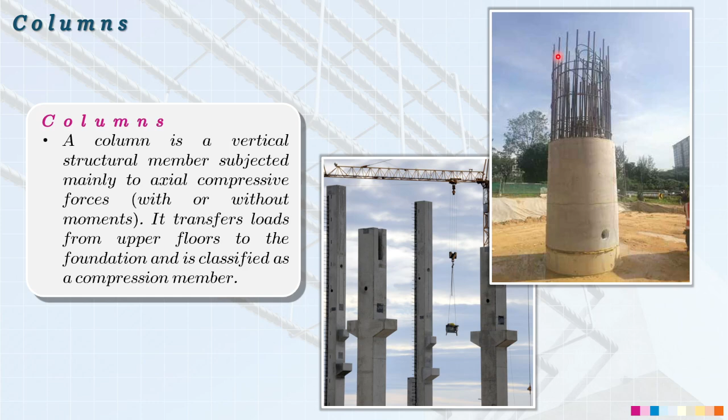This means that our column experiences what we call compression stress. If we use a particular material for our column, the best material for this is obviously concrete. And also, to resist the bending or twisting or other reactions experienced by our column, we also place main reinforcements.

Alright, so we will have types of columns. One aspect here is based on form and reinforcement. This means that the type of our column is mainly based on how it is constructed. One of the most common types we see is what we call the plain concrete pedestal.

When we say plain concrete pedestal, or simply a pedestal, this is a type of RC column or reinforced concrete column where the height is small. Mainly, the pedestal is used when we have steel members, or when we have steel columns. It's mainly used when we have supporting equipment, and its main frame consists of steel.

A good example here is when you construct a steel pole. In actual scenarios, there are steel poles that cannot be directly buried in the ground, because we know that steel is prone to corrosion. So in order to do that, we first attach it to what we call a pedestal, which consists of a base plate, and also anchor bolts, which become the connection between our concrete member, the pedestal, and our steel members.

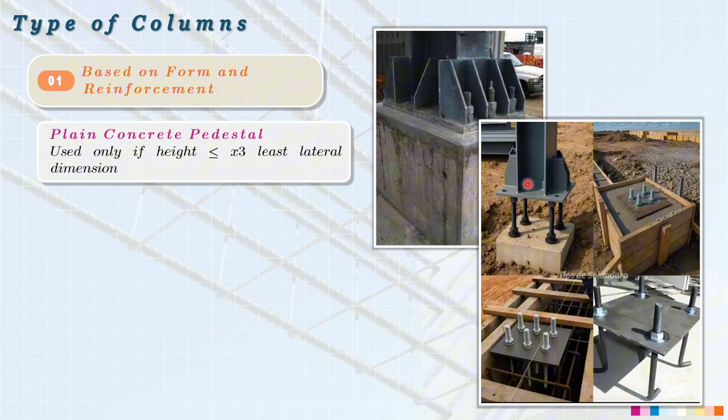So the next type of our column is what you call tied columns. This is the most common in construction, because when we say tied columns, it means that the longitudinal bar, to hold up its position, uses what we call lateral ties. This was already discussed in the topic of beams.

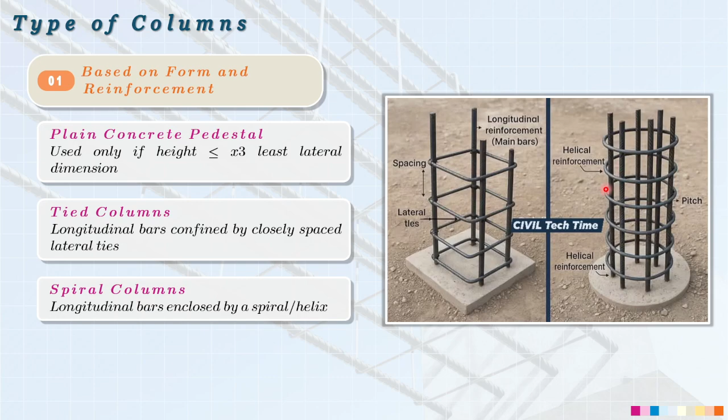The last type of column is what you call composite columns. Composite columns means reinforced concrete combined with steel members, or structural steel, meaning it's not just reinforced concrete material. We introduce steel sections which can be I-beam, wide flange, or pipes. Typically in this class, composite columns are not paired with main reinforcement because the main reinforcement is the steel member itself, though in other designs rebar is still added. Overall, once you introduce a structural steel like wide flange or pipes, the column is no longer a reinforced concrete column, it is now called a composite column.

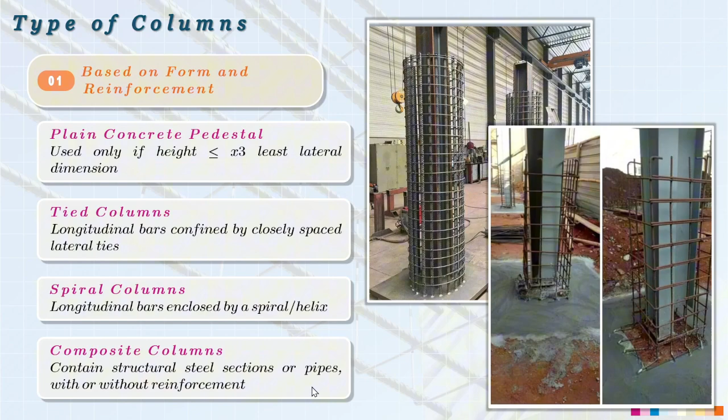We also have types of columns based on loading position. The first is what we call axially loaded columns. This means that if we apply a point load on the cross-section of our column, it is located at the very centroid of the column. This is where the loading is always applied. This means the column experiences compression stress.

Another type based on load position is what you call eccentrically loaded column. This means we will consider what you call eccentricity. If we consider eccentricity on our point load, it means we will have what is called a bending moment.

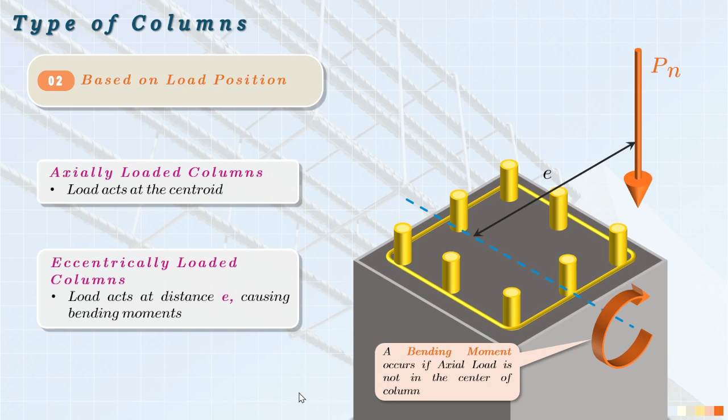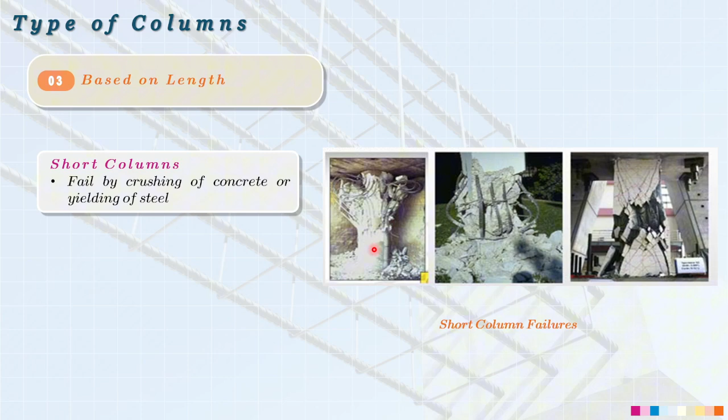Let's continue with the types of column based on length. We have two types of column based on length. The first is the short column. When we say short column, if we only consider the length, we won't actually know if it's a short or long column. To properly define it, we need to consider how the column fails. If the failure of the column is based on crushing, meaning the column is compressed, then you are seeing a short column. This means there is failure of the concrete and failure of the steel at the same time, but the behavior of failure for a short column is simply by crushing or compression, as you can see in our sample images.

The next one is the long column. When we talk about long column in terms of failure, instead of a crushing failure, there is what we call buckling. Buckling means there is bending happening, meaning the column is not simply compressed into a final shape but instead experiences bending. This kind of bending is what we call buckling. So if you are seeing this kind of failure, you are seeing a long column.

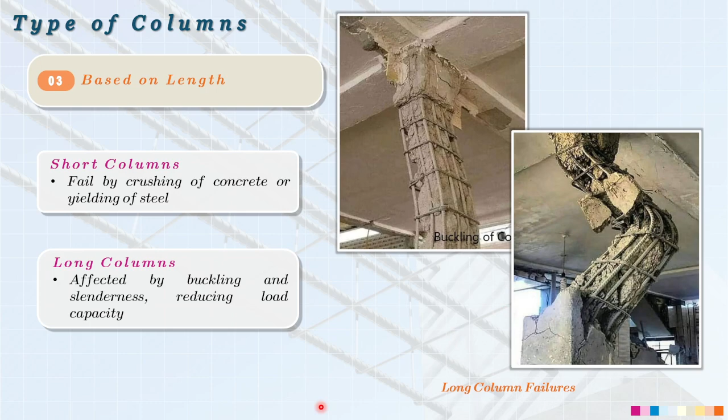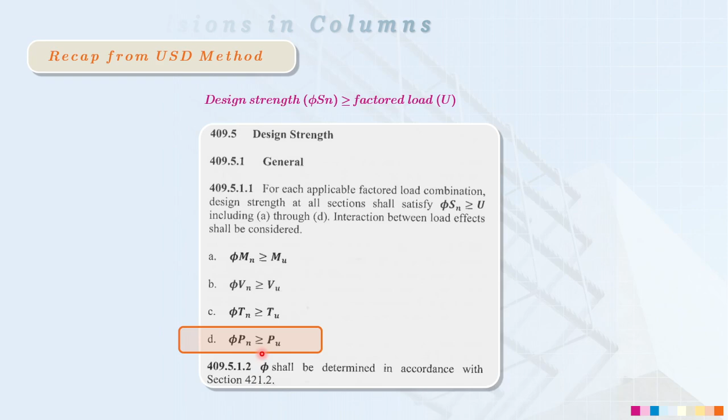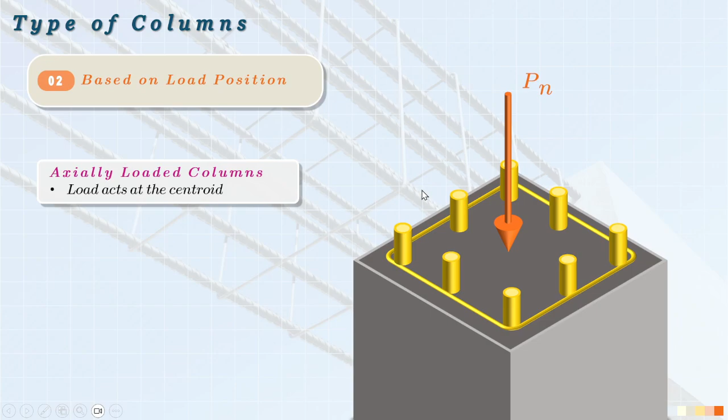We need to follow the proper strength reduction factor, especially when designing for an axially loaded column. Remember that for columns, especially axially loaded columns, if the loading lies at the center of the concrete column, you will use the following strength reduction factors, only these two, depending on what kind of tie or enclosure you will use. If you will use a spiral enclosure, you will use the strength reduction factor of 0.75.

Kapag ang ginamit mo naman is lateral tie or just simply a stirrup, you will use a strength reduction factor of 0.65, which you will see in our code provision. Since our column is compression controlled, this is the reduction factor you will use. Kapag spiral, 0.75. Kapag lateral tie, this is 0.65.

Saan natin gagamitin yung ating strength reduction factor sa column? We will use this derived formula coming from our code provision. As you can see, this is the already derived formula, depende kung anong klaseng enclosement yung gagamitin mo. But first, we need to know that we will have two types of nominal strength here.

First is the normal nominal strength. Dito sa section 422.4.2.2, this is the general formula for the nominal strength: P sub O is equal to 0.85 F prime C, A sub G minus A sub ST, plus Fy multiplied by the area of steel in the column. This P sub O is only the nominal axial strength, especially in zero eccentricity.

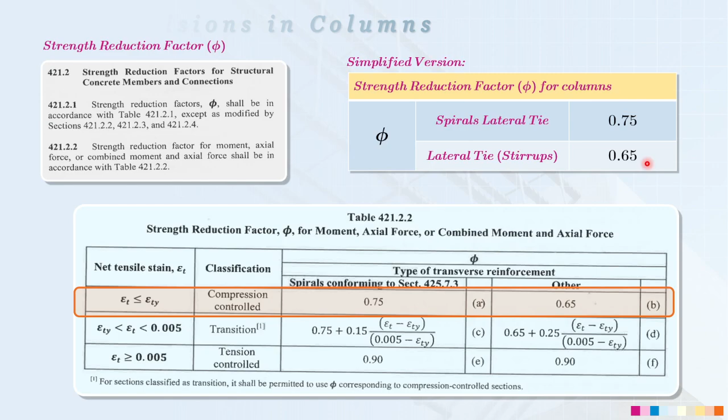Baka mamaya kasi ma-confuse kayo sa paggamit ng 0.8 and 0.85 kapag kayo ay maghahanap ng ultimate strength or design strength, which is hindi or maling approach yun. Kasi after natin ma-identify kung anong type of column or enclosement ito, you need to multiply by the respective strength reduction factor.

Ang pag-uusapan lang natin ngayon is only axially loaded column. Ibig sabihin, we will not consider here a value of eccentricity, ibig sabihin nasa gitna yung location ng ating actual load. Kung babalikan lang natin yung mga terms natin, yung ating gross area stands for A sub G.

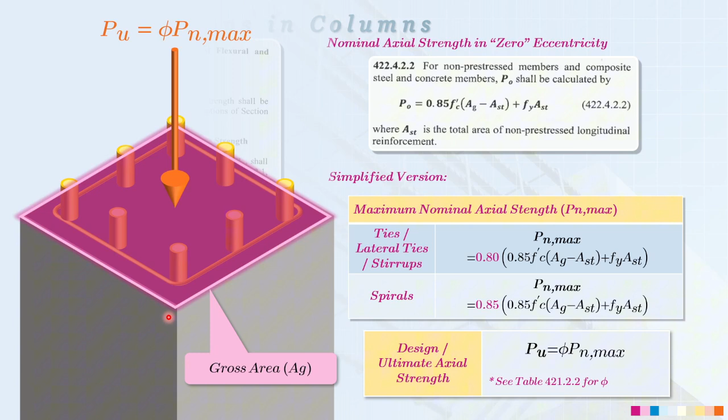Please remember, pagdating natin sa column, ang i-consider lang natin na gross area is the total area of the column. Kasi noong nakaraan, yung definition natin ng gross area, lalo na pagdating natin sa beam, ay hanggang effective depth lang. However, sa column, ang i-consider na natin na gross area ay yung kabuuang cross-sectional area ng ating column. At ang A sub ST naman, ibig sabihin lang nito, this is our area of main reinforcement. You can write this one as only A sub S.

Alright, so once we've done the determination of our nominal axial strength and the maximum nominal axial strength, we need to know the following limits we need to consider here. First is the longitudinal reinforcement, okay? So longitudinal reinforcement, class, this just means how far we will limit our area of reinforcement or our area of main reinforcement.

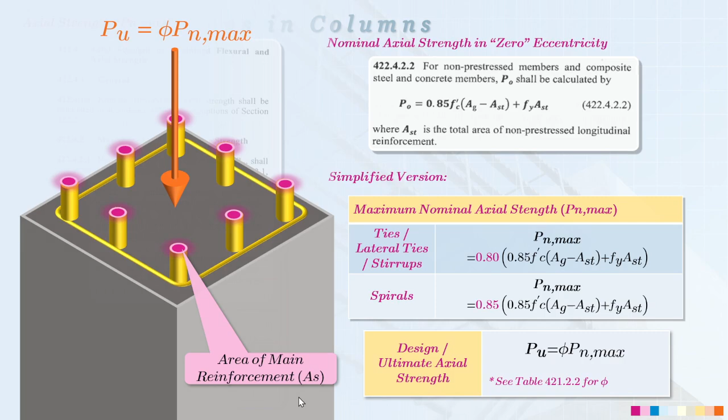So we also follow here the minimum area of reinforcement and maximum area of reinforcement, which is the minimum value is just 0.01 A sub G, and also the maximum value is 0.06 A sub G or gross area. But of course, it's better that we interpret this provision in terms of steel ratio. So the actual steel ratio should not go below 0.01 and should not exceed 0.06. Okay? That's only for columns, since we are using the longitudinal reinforcement provision in this matter.

Okay, another thing is when your column has circular hoops, or if the shape of your column is circular, technically class, the minimum number of bars you should consider is at least 6. It can't be 4, it can't be 2. The minimum reinforcement or number of rebars needed for a circular column is always 6. From 6 upward, that's your limit. Okay?

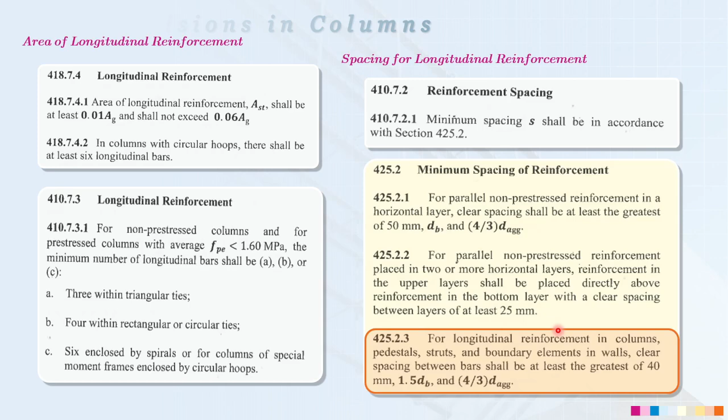Okay, then in terms of spacing of our longitudinal reinforcement, if you recall, our first topic didn't tackle this spacing, which is this provision. Okay, so this provision, class, always remember that this is under columns. At this moment, class, we will now determine the clear spacing between longitudinal bars, especially in columns. Okay, so when we talk about square or rectangular columns, that just means we solve for the clear spacing between the main reinforcement using the geometry of that particular side.

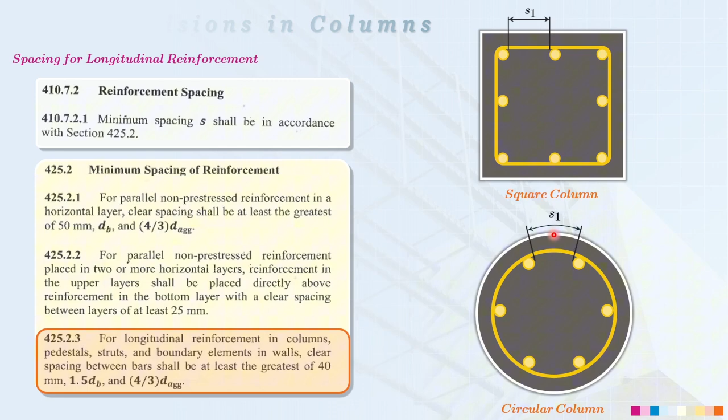Okay? For circular columns, it's a bit tricky because what you need to do here is first get the center of our main reinforcement. And also, to get our clear spacing here, you can use the formula for the circumference, which is the simplified version of our earlier provision on clear spacing.

Okay, so please take note that the minimum spacing of vertical or longitudinal reinforcement, especially in columns, should be the maximum of 3 aspects. First is 40 millimeters. Second is 1.5 times the size of our rebars. And then 4/3 of the diameter of the aggregates. So whichever is highest among the three, that becomes the minimum spacing for your vertical reinforcement, especially in columns.

And also, to know the minimum dimension of the column size, obviously these are the following derived formulas. So let's tackle first when our column is, let's say, square or rectangular. So this B, class, this is the dimension of one side of our column.

To get that, what you do, similar to what we did for the rectangular beam, is first: 2 concrete cover plus 2 diameter of stirrups or 2 diameter of lateral ties, plus the number of our main rebars. Then you need to multiply it also by the diameter of our main rebar. And then, we subtract one from the number of our main reinforcement to determine the clear spacing between the main reinforcement. So that's for a square column.

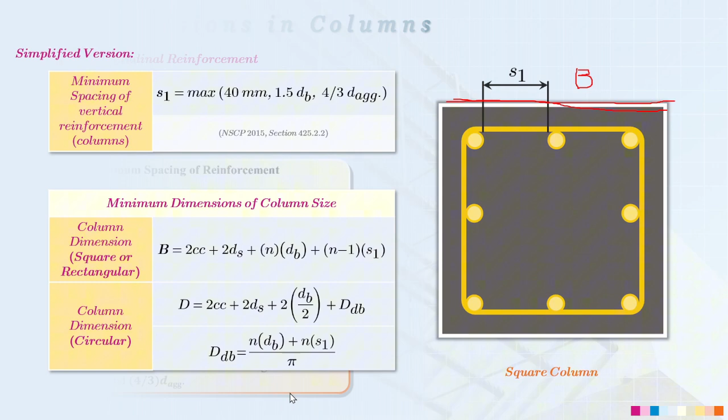For a circular column, your approach will be different. Because now, class, what happens is you need to first determine the diameter from the center of our main reinforcement. Okay, so what you get is the formula to determine the clear spacing. By the way, here in the circular column, in this part, if you notice, our approach to the number of main reinforcement and also the number of spacings, as you can see, has no minus 1. This means, class, however many rebars you have in the column, that's also the number of clear spacings you'll have. Okay?

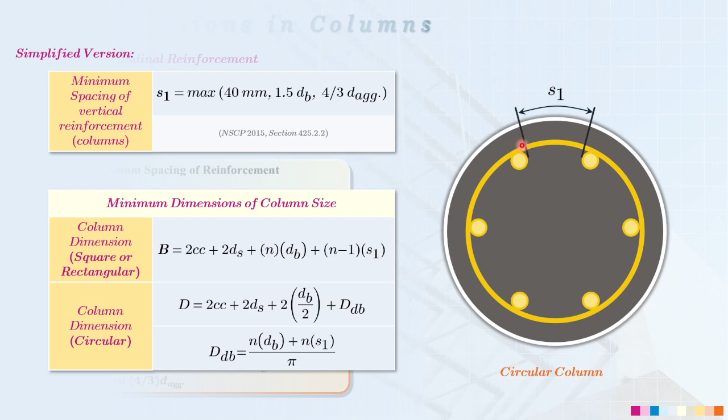Okay, so let's talk about spacing for our lateral support or lateral ties. So as I mentioned, we have two types of stirrups. One is called ties, the second is called spiral. We have respective code provisions for ties and spiral. Actually, the most detailed solution here, if you consider it, comes from shear, since the purpose of stirrups is to resist shear. However, in this scenario, our concern is only non-seismic design, meaning the spacing we'll use is consistent.

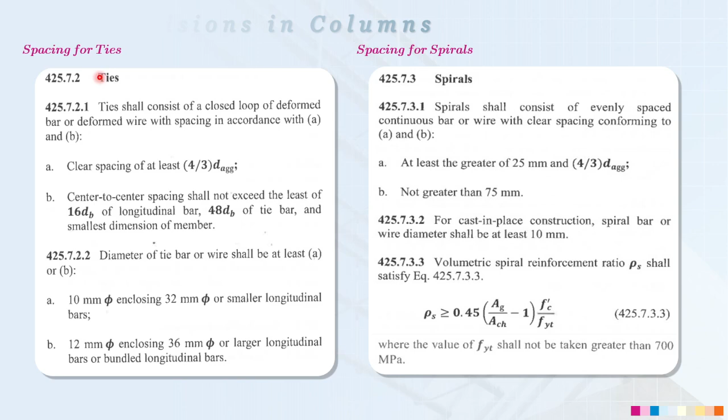So when it comes to spacing for the ties, please remember that we need to know what is the minimum spacing. This just means what will be the governing spacing among them, and under this provision, you will follow 3 spacing requirements.

First is 4/3 of the diameter of the aggregate. Second is 16 times the diameter of the main reinforcement. Actually, there are 4 conditions - the third is 48 times the diameter of the tie bar, and lastly, the smallest dimension. So among these 4 conditions, whichever gives the smallest value, that becomes your spacing for the lateral ties, as you can see in our image.

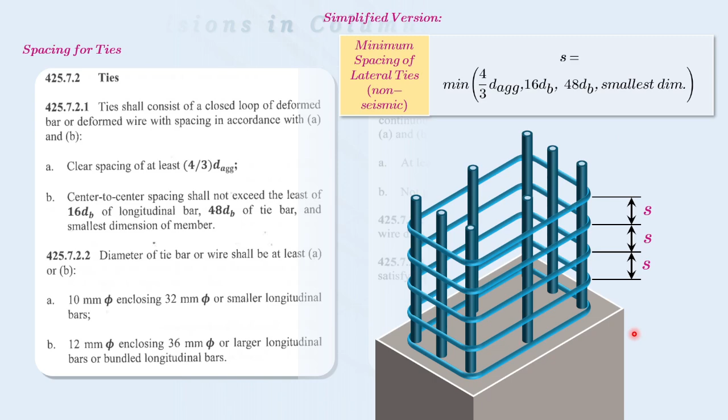However, when it comes to spacing of our spiral, you will follow this condition: the spacing here should not be less than 25mm, and by the way, this is pertaining to center to center. So in our code provision, these two values are only clear spacing. But since our application of the lateral reinforcement is only center to center, it needs to be center to center.

So in our interpretation, we need to add 1/2 of our diameter of stirrups - since there are two sides, it becomes plus the diameter of stirrups only. So for spiral, it should not go below our lower limit, which is this one, and also should not exceed our upper limit, which is 75 millimeters plus the diameter of the stirrups.

So to find the spacing for our spiral, you will use this formula: 4 multiplied by the area of the spiral, or the area of the ties or stirrups to be used, which is only the area of this spiral. And then we'll have a new notation or variable, which is rho sub S, and lastly, D sub C.

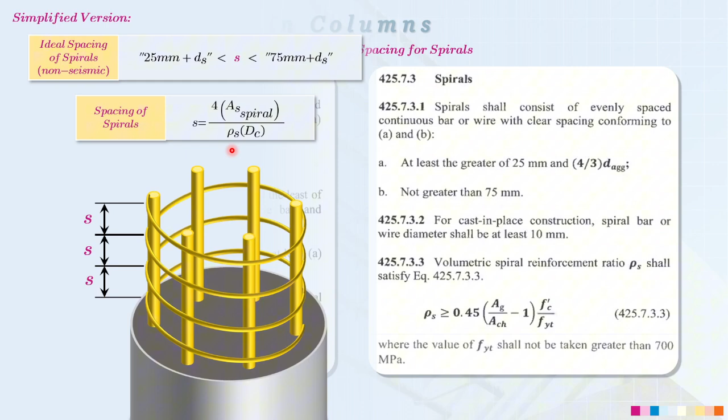So rho sub S means this is the volumetric spiral reinforcement, as you can see in our formula or provision. To get the formula for the volumetric spiral reinforcement ratio, you can use this formula: 0.45 multiplied by the gross area divided by the area of the core of the concrete minus 1, then multiplied by F prime C over the yield strength of your ties or stirrups.

So there are new variables you need to understand. First is D sub C. When we say D sub C, technically this is only the diameter of the concrete core. This means to get this diameter, what you need to do is subtract from the dimension of your circular column, which is mainly diameter, then subtract 2 times the concrete cover. Since the concrete cover is on both sides, you subtract it by 2, and you will get the value of the diameter of the concrete core.

However, what does A sub CH mean? This is the area of the concrete core. This means to get the area of our concrete core, of course the diameter you should use is only the diameter of the concrete core, which is just the area of a circle.